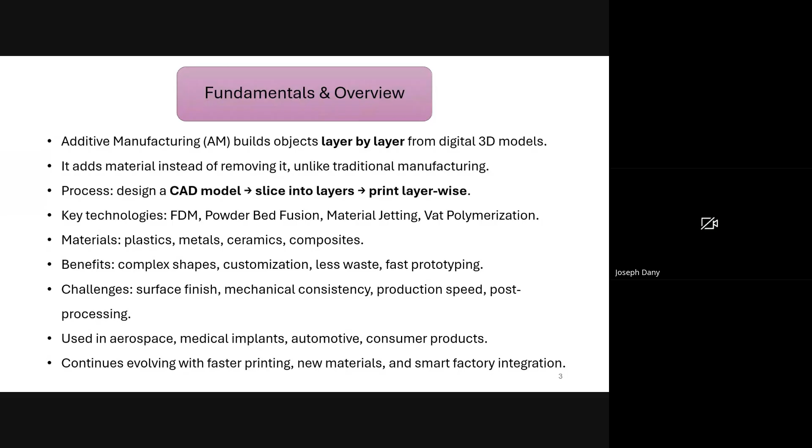AM is expected to evolve with faster machines, multi-material capabilities, integration with smart manufacturing and Industry 4.0, and advances in materials and printing techniques. In summary, additive manufacturing is not just a new way to make things, but a fundamental shift in manufacturing philosophy, moving from subtracting material to adding material, opening new possibilities for product design and manufacturing workflows.

So let's start with the simple question: what are the different additive manufacturing processes? Additive manufacturing is classified into two different categories based upon the route.

The first one is fusion-based additive manufacturing, and the other one is solid-state additive manufacturing. Each of these categories has its own way of building parts, its own advantages, and of course some challenges.

In fusion-based processes, which are probably the more familiar ones, the raw material, usually in the form of metal powders or wires, is completely melted using a high energy source such as laser or electron beam, and then allowed to solidify layer by layer. Processes you might have heard of include powder bed fusion, selective laser melting, electron beam melting, and directed energy deposition. The biggest strength of fusion additive manufacturing is its ability to make very intricate and complex geometries, parts that would be almost impossible to produce using conventional methods.

That's why industries like aerospace and healthcare love fusion-based additive manufacturing. For example, in aerospace, turbine blades with internal cooling channels can be built using powder bed fusion. In healthcare, patient-specific implants such as custom hip replacements are possible. Even high-performance automotive companies like Bugatti have used it to make titanium brake calipers that are both lighter and stronger than conventionally manufactured parts.

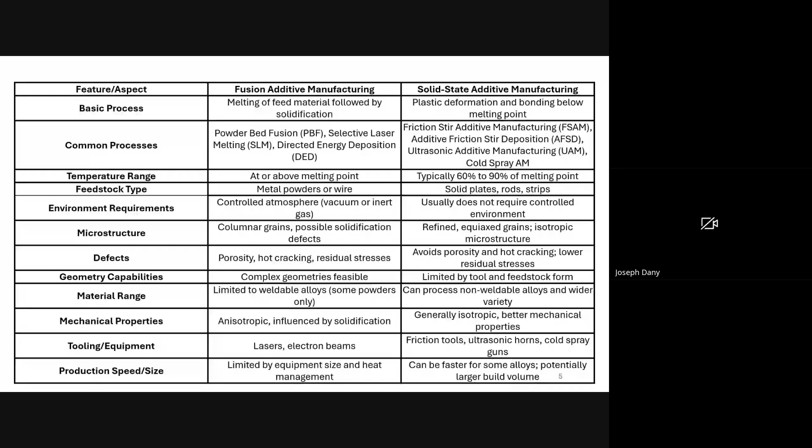Solid-state additive manufacturing is categorized into three different categories: friction welding based, friction deposition based, and friction stir welding based. These are further classified into subcategories: linear friction welding based and rotary friction welding based come under friction welding based additive manufacturing techniques, and friction surfacing and friction deposition come under friction deposition based additive manufacturing.

In friction stir welding based additive manufacturing, there are three different subcategories: friction assisted seam welding, additive friction stir, and friction stir additive manufacturing.

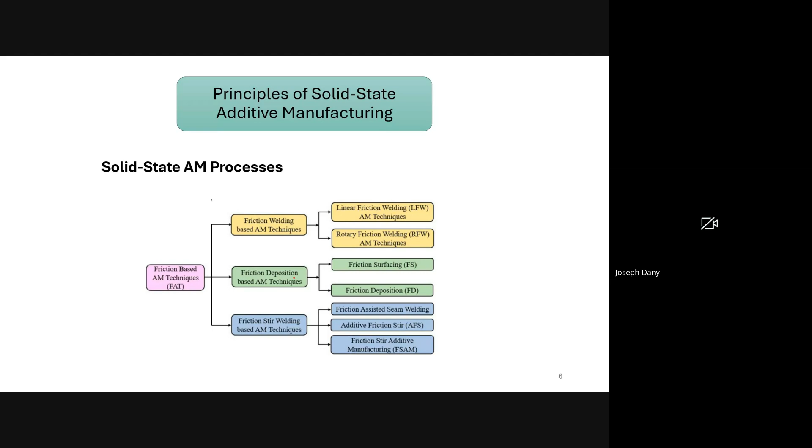First, we will start with linear friction welding additive manufacturing technique. Linear friction welding, often abbreviated as LFW, is a sophisticated solid-state additive joining process that has become particularly vital in industries like aerospace, automotive, and energy due to its ability to produce high-quality, structurally sound welds without melting the base material.

Unlike traditional fusion welding, where the metal melts and solidifies, LFW works by moving one piece in a controlled linear reciprocating motion against a stationary component while applying high axial compressive force. This relative motion generates significant frictional heat at the faying surfaces, the surfaces to be joined, which softens the material at the interface without reaching its melting temperature.

This localized heating allows the material to enter a plasticized state, enabling atomic level bonding and forming a weld with minimal distortion and residual stress. The linear friction welding process can be divided into four distinct phases that ensure strong and defect-free joints.

The first phase is the initial contact and friction stage, where the relative sliding motion causes microasperities, or roughness, on the surface, increasing the real contact area and starting initial heat generation.

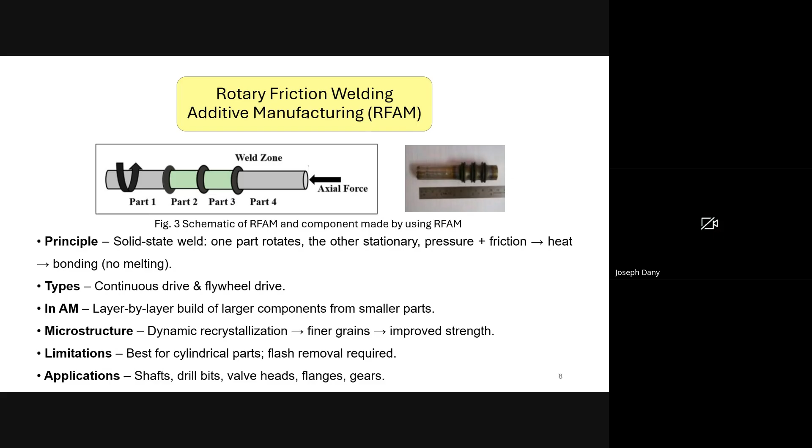When it comes to friction deposition additive manufacturing, it involves using two rods. One is a consumable rotating rod, and another is a stationary substrate rod. Both rods are attached to machine spindles and aligned along the same axis. The consumable rod is rotated and pressed against the stationary rod with a certain axial force.

When these two rods come into contact, friction generates heat at their interface, which softens and plastically deforms the material at the contacting surface. As this process continues, the amount of plastic material increases at the interface. Once the desired thickness of deposited layer is reached, the rods are withdrawn.

Importantly, when the rotating consumable rod is stopped and pulled away, the plastically deformed material remains attached to the stationary substrate. This happens because the torsional shear stress at the interface causes the plasticized material to detach from the rotating rod and stay bonded on the substrate.

For building multiple layers, after depositing a layer, CNC machining is used to flatten and prepare the surface before adding the next layer. This step is necessary to ensure good bonding and surface finish for the subsequent layer.

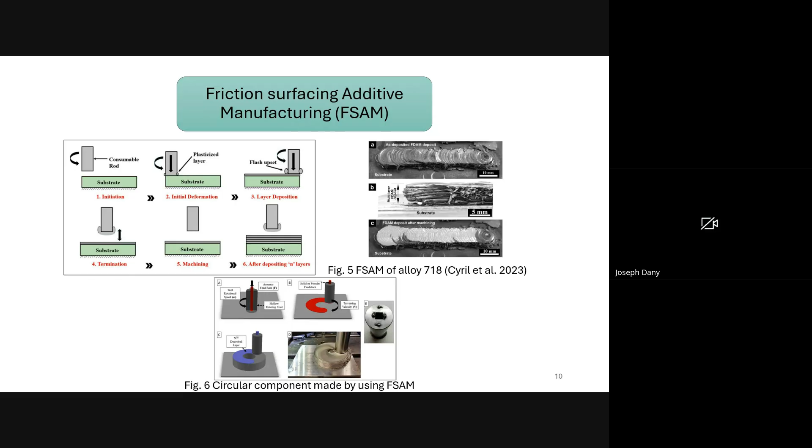Now let me talk about some techniques that are based on the principle of friction stir welding. These include friction assisted seam welding, additive friction stir, and friction stir additive manufacturing. Collectively, we call them friction stir additive manufacturing, or FSAM. In these methods, metals are joined in a solid state, layer by layer, as we have seen in previous additive manufacturing techniques.

Deposition of layers means we can avoid unwanted phase transformation and defects that usually occur in fusion-based processes. The parts produced by friction stir additive manufacturing techniques usually have fine microstructures, as we've seen in friction surfacing additive manufacturing, with grains that are almost equal in length, resulting in fewer defects overall. Essentially, friction stir additive manufacturing combines the strength benefits of friction stir welding with the flexibility of additive manufacturing. This makes it possible to manufacture even complicated shapes in relatively less time. Currently, this technique is mostly used in research for producing simple shapes, but it clearly shows promise as a flexible and hybrid manufacturing technique for the future.

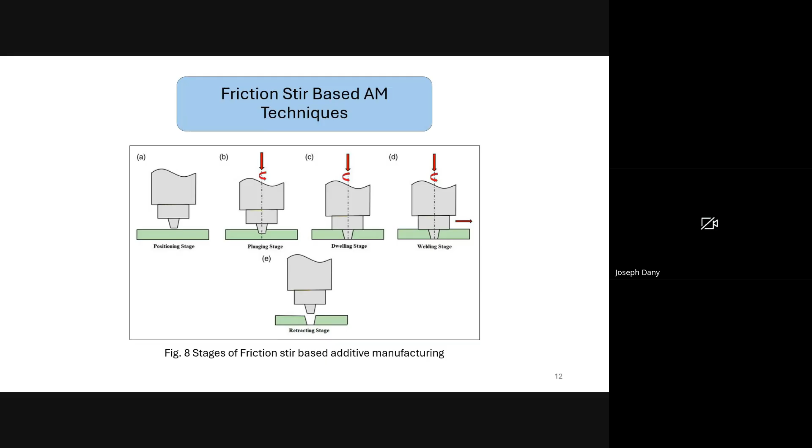Two plates or sheets are placed one over another. Then the pinless rotating tool is pressed down axially onto the top surface of the upper plate. Because of the rubbing action between the tool and the plate surface, frictional heat is generated, which makes the top surface plastically deformed. As the axial force continues, this deformation progresses through the thickness until it reaches the top surface of the bottom plate. The rise in localized temperature here is due to both heat transfer from the tool and the continuous stick-slip action, which enhances plastic deformation.

Now, by repeating this step, similar to the way we do in friction surfacing, we can also perform multi-track seam welding. Coming to additive manufacturing using FASW, here we join multiple layers, either in a single track or multi-track manner. Although studies are limited, this method has been successfully used for materials like aluminum 6061, titanium Ti6Al4V, and stainless steel 304, in both similar and dissimilar combinations, for thicknesses ranging from 0.5 mm to 5 mm.

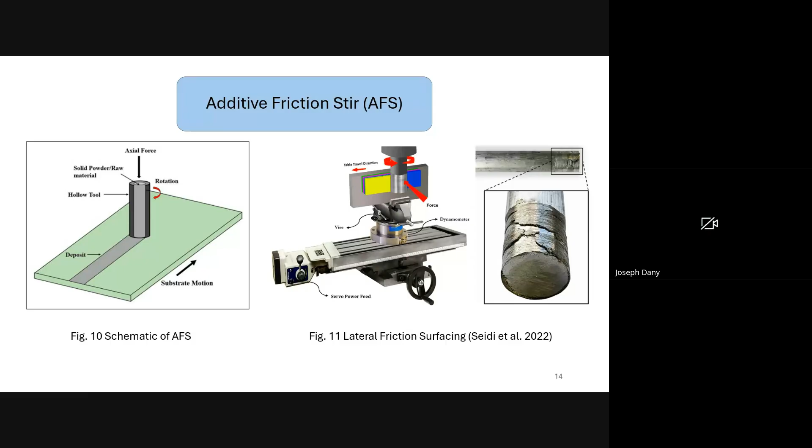The next one is friction stir additive manufacturing. It is a well-known technique in both the welding and additive manufacturing world.

This is a relatively novel technique that combines the principle of additive manufacturing and friction stir welding. The first patent on friction stir additive manufacturing actually came out in 2002.

Later, companies like Boeing explored its feasibility for fabricating aircraft parts. Since then, FSAM has gained a lot of attention in research because it allows us to fabricate materials layer by layer with exceptional structural performance compared to the base materials.

FSAM not only fabricates a component but also gives us the ability to control and modify the microstructure of the part. That means the microstructure can actually be tailored to meet specific customer requirements. As a result, the parts produced by FSAM generally show improved mechanical properties. In fact, even high-strength metallic alloys have been successfully fabricated using this technique.

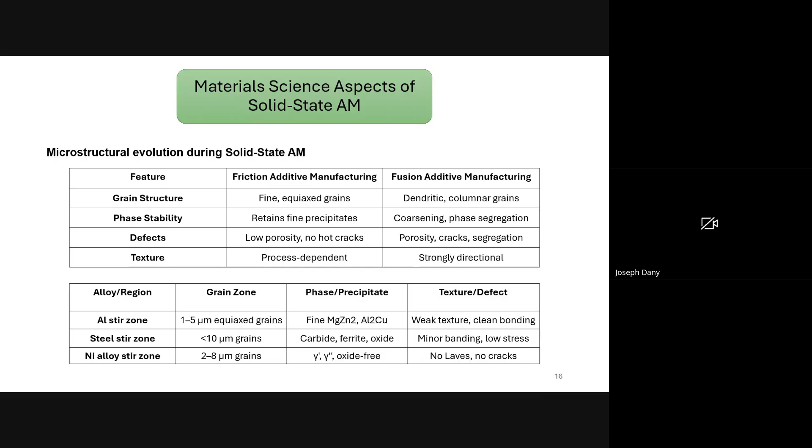Let's break down what happens to the microstructure during friction-based additive manufacturing, like friction stir additive manufacturing. Unlike fusion-based additive manufacturing, where melting and solidification cause a lot of complicated changes, this process works entirely in the solid state. So the metal gets heated by friction, mechanically deformed, and shaped without ever melting.

Just give me a minute.

When we look into the microstructure of fusion-based additive manufacturing, such as laser powder bed fusion or direct energy deposition, it involves layer by layer melting and solidification of metallic powders to build parts. The microstructure evolution is primarily driven by rapid localized melting, followed by very fast solidification rates, often millions of Kelvin per second, and steep thermal gradients. This rapid solidification creates distinct microstructures dramatically different from those in traditional casting and forging.

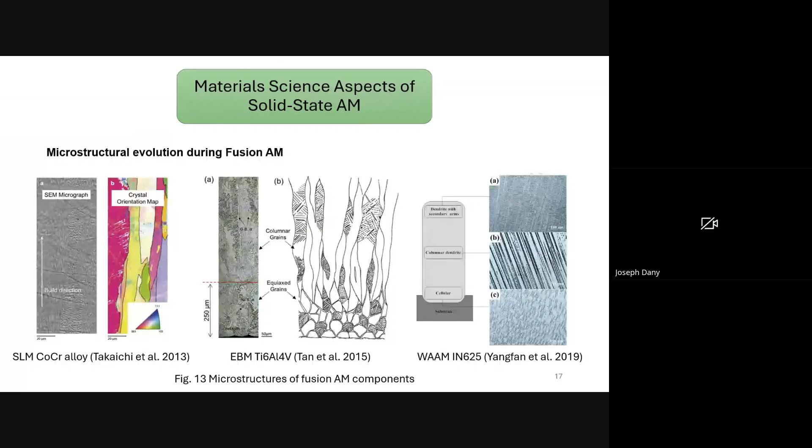Overall, fusion-based additive manufacturing creates complex microstructure shaped by rapid solidification and directional grain growth that impart a unique blend of high-strength, moderate ductility, and anisotropic behavior.

Microstructural evolution in friction-based additive manufacturing is overwhelmingly governed by dynamic recrystallization (DRX), a direct consequence of intense plastic shear and frictional heating imposed by the rotating tool. During friction surfacing, material in the process zone is subjected to very large strain at elevated temperature, well below the melting point.

Those conditions produce very high dislocation density and promote recovery and rearrangement of dislocations into subgrain structure. In high stacking fault energy metals such as aluminum and nickel, this typically proceeds as continuous dynamic recrystallization (CDRX). Subgrains form and gradually rotate and absorb dislocations until low angle grain boundaries convert into high angle grain boundaries, producing new, strain-free equiaxed grains.

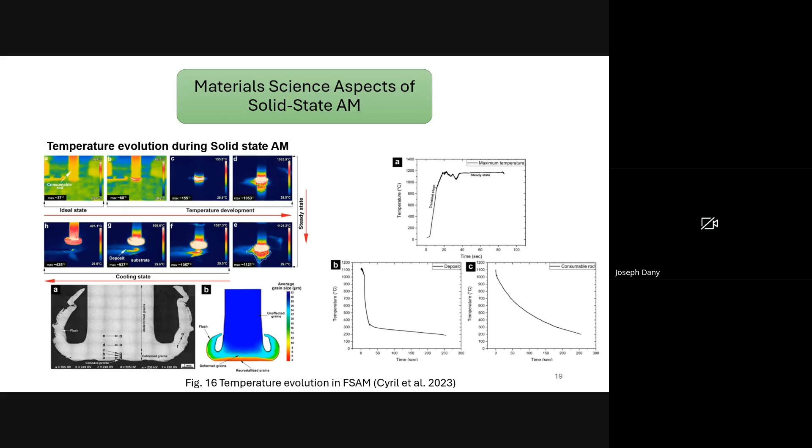Solid-state additive manufacturing generally produces uniform microstructure because the process involves intense plastic deformation and localized heat below the melting temperature, promoting dynamic recrystallization throughout the deposited layer. This mechanism refines grains and achieves metallurgical bonding between layers without the coarse microstructure typical of fusion processes. The consistent localized heat input and deformation cause fine equiaxed grains to form uniformly across the layers, as deformation paths and recrystallization conditions remain similar within each deposition cycle.

However, some cases exhibit microstructural differences between layers, typically in grain size or morphology, due to the complex interplay of heat dissipation, reheating, and thermal gradients during successive layer deposition. The primary reasons are: heat generated at the deposition zone is rapidly transferred to the substrate and previously deposited layer. The underlying layers experience varying degrees of thermal exposure depending on their spatial location relative to the heat source.

So heat flows downward through the cooler substrate material and upward through newly deposited material, leading to different cooling rates and temperature profiles from layer to layer.

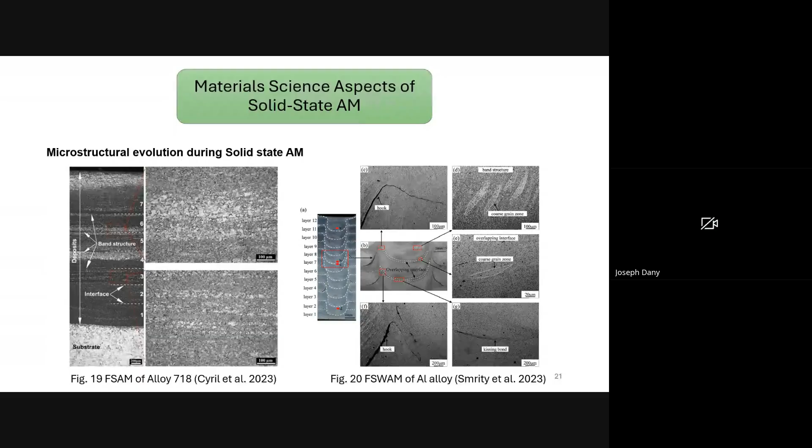In fusion processes, these bands often have a strong influence on the mechanical properties because they are associated with variations in solidification structure, segregation, and residual stresses. However, in solid-state additive manufacturing, the effect of banding on properties is much less pronounced. This is because the overall microstructure is dominated by fine recrystallized grains produced by severe plastic deformation and dynamic recrystallization, which largely govern the mechanical response and tend to homogenize the performance despite the presence of banding structure.

When it comes to defect formation and elimination of defects in solid state additive manufacturing, especially in friction stir welding, friction stir additive manufacturing can broadly be categorized into volumetric defects and surface or joint line defects. Understanding these defects and how they correlate to process parameters allows avoiding them and achieving sound joints.

Volumetric defects include unbonded regions or voids inside the deposited or joined material volume. These voids or unbonded regions degrade mechanical performance and require machining to remove. In solid state additive manufacturing by friction-based methods, improper material flow or insufficient bonding energy causes these defects.

Other defects in FSW-based solid-state additive manufacturing arise mainly due to incorrect parameter settings such as tool rotation speed, welding traverse speed, tool tilt, plunge depth, and force.

There are various surface defects or subsurface defects found in friction-stir additive manufacturing. The first one is surface galling, which is caused by excessive sticking of material to the tool pin, often due to too high weld pitch or excessively hot weld, creating protrusions and lumps on the welded surface.

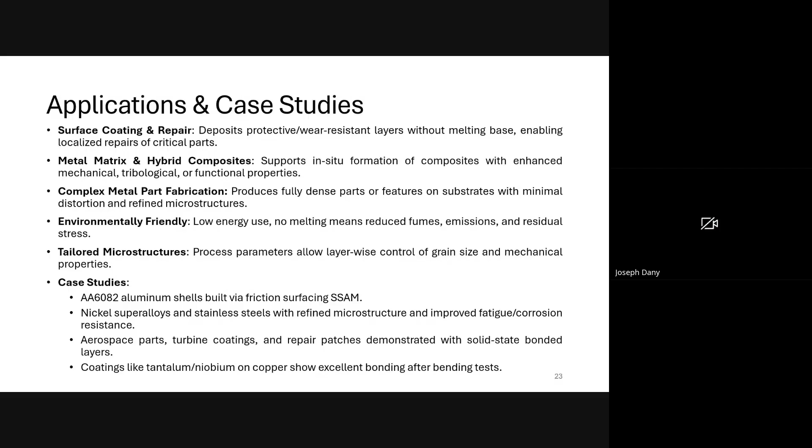These adoption examples demonstrate solid-state additive manufacturing's versatility in joining and repairing, where thermal effects from fusion welding are detrimental. The processes offer superior metallurgical bonding, controlled microstructure, and cost-effective localized repair solutions in critical applications across high-value industries.

I have summarized the challenges and future trends of solid-state additive manufacturing. The first challenge is material limitation: it is primarily effective for ductile materials, with challenges existing for high-strength, brittle, or reactive alloys.

The second is anisotropy in mechanical properties; variations in bonding between layers can cause anisotropy in strength and ductility. Then there's process control complexity: precise control of parameters such as tool speed, force, and feed rate are critical to avoid defects and achieve consistent quality.

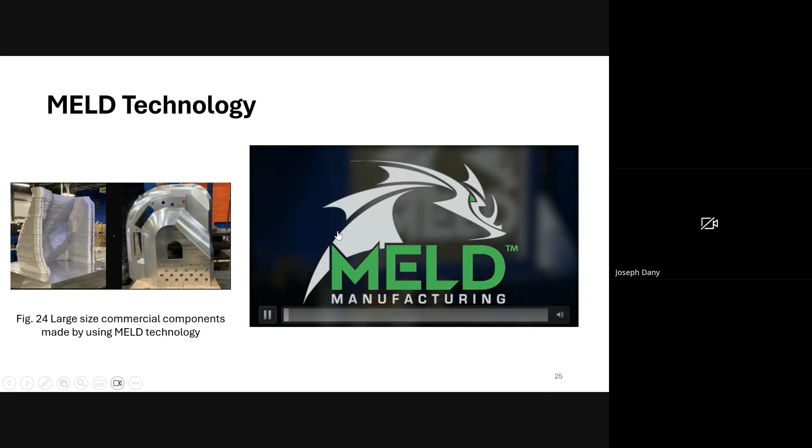Here, if you see, the spindle moves along different directions, which is controlled by computer program, and the consumable material is fed continuously through the spindle.

This seamless operation eliminates the defects during start and stop of the process, and also eliminates the defects produced during layer-to-layer transition during deposition. So we can build a number of layers seamlessly to get large size complex commercial products.

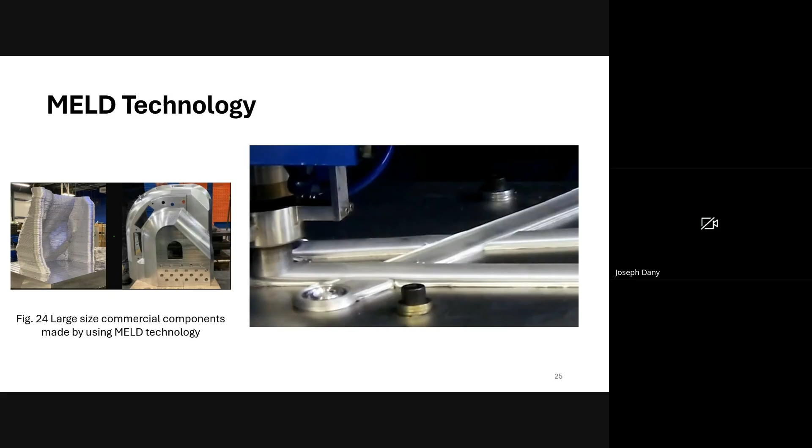I hope this gives you a clear picture of how MELD technology tackles one of the biggest hurdles in solid-state additive manufacturing and opens up exciting new possibilities for metal 3D printing.

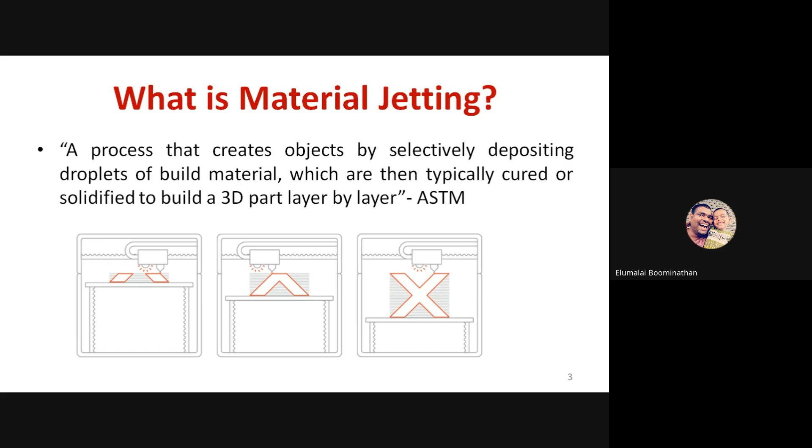Material jetting, as defined by ASTM, is the process of creating objects by selectively depositing tiny droplets of material, which are then solidified layer by layer to build a three-dimensional part. This is very much similar to inkjet printing that we generally use, but except that in material jetting, it is printed in three dimensions, one print over another. In other processes, like SLS and FDM, we use filaments and powders, but in material jetting we use inks, or liquid materials. That is the distinct feature of this process.

Material jetting is widely regarded as a cost-effective and high-throughput technology, especially when precision, surface finish, and multi-material printing are needed. The applications already cover a broad spectrum - microsystems with embedded electronics, optical lenses, functionally graded materials, bio-inspired structures, microfluidic systems - kind of different applications through material jetting.

The material jetting process is very simple. You print through a jet, you cure it, and it generally uses a support structure, then you can remove the support structure and use the product. But there are challenges in material jetting from different perspectives. You have very limited inks, meaning very limited materials that can be printed in material jetting.

There is also something called waveform optimization in droplet formation that we'll discuss later. The interaction between the material jetted from the nozzle and the substrate which is already printed, the curing as post processing, and the multi-material compatibility and characterization of the inks also pose certain challenges for the material jetting process.

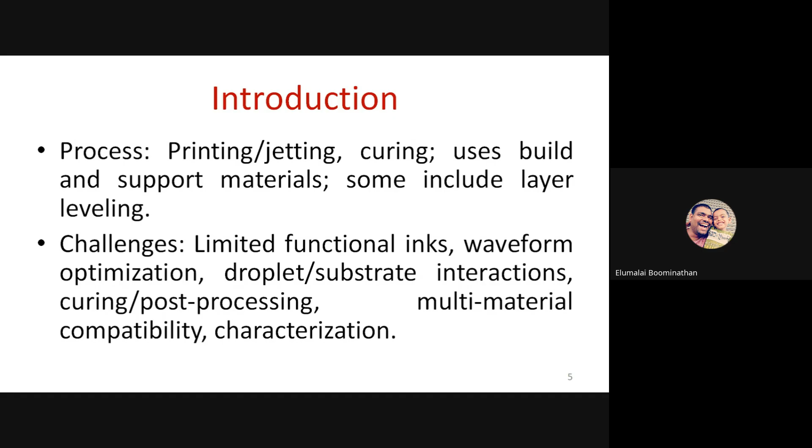There are distinct limitations of the material jetting process. The low mechanical and thermal properties of the material jetted inks lag in performance compared with other additive manufacturing technologies. But there are three or four different categories of the material jetting process that we will discuss one after another.

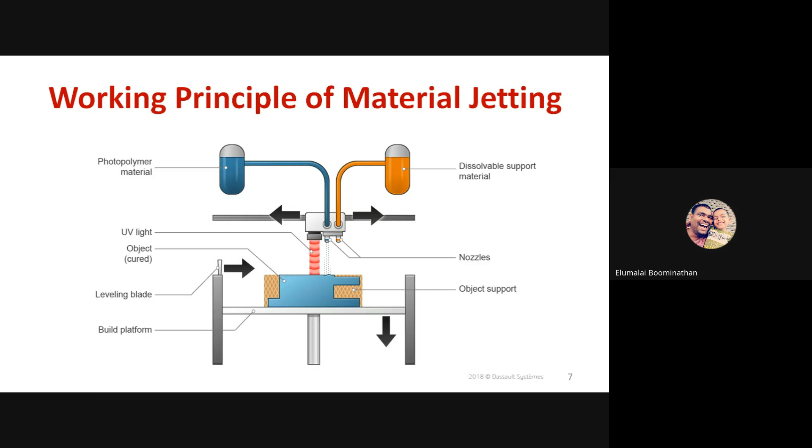So you have multiple nozzles, and some nozzles are used to print the build material, while some nozzles are used to print the support materials.

These are all the major parts of any multi-jet printer. It includes precision printers, a controlled build platform which moves upward or downward based on the layer thickness, a system to control the droplet, and integrated UV curing units.

The advanced multi-jet printers have multiple nozzles to enable different colors or different materials in the same product. For example, you have PolyJet from Stratasys. They can produce multiple materials with excellent resolution. You also have XJet's nanoparticle jetting that allows you to use metals, which we'll discuss.

There are three distinct types of material jetting machines available: PolyJet, multi-jet from 3D Systems, and XJet or nanojet. These three multi-jet printers are commercially available and use three different principles.

The Stratasys PolyJet uses continuous printing, meaning it continuously ejects the ink onto the substrate along with the support. Whereas the multi-jet printing of 3D Systems uses a drop-on-demand system, where the nozzle deposits ink wherever required. Both these systems use UV light for curing, and both can only print polymers.

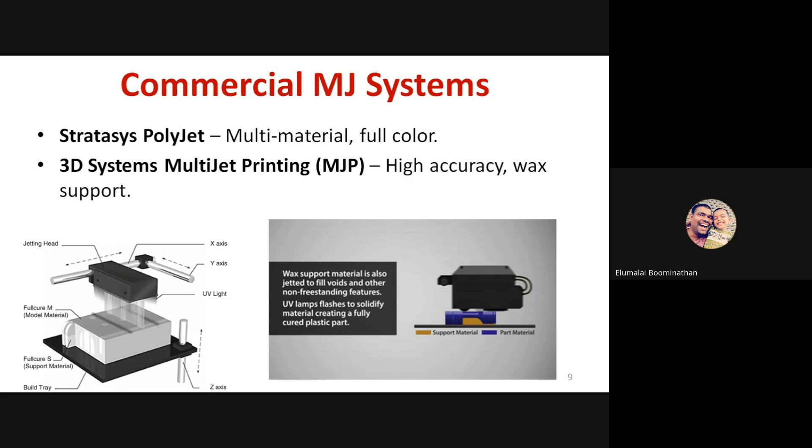We have another multi-jet system from XJet's nanoparticle jetting, in which the ink contains nanoparticles of metals or ceramics, so you can produce a metallic part or ceramic part. Here, instead of UV light for curing, we use a heater, because this ink is very much different from the inks used in PolyJet or multi-jet.

In PolyJet and multi-jet, they use photopolymers as ink. Here, we use nano binders with nanoparticles, and these inks contain nanoparticles of metals and ceramics, whatever you require. After the ink gets printed layer by layer, we have a heating source that will cure the component.

So what I'm trying to say is we have two different kinds of multi-jets. One type uses either continuous ink drops or a drop-on-demand setup, but uses photopolymers as the build material. Whereas nanoparticle jetting uses a different type of ink filled with metallic or ceramic nanoparticles. One type of multi-jet printer uses UV light to cure, while nanoparticle jetting uses a heater to harden the component.

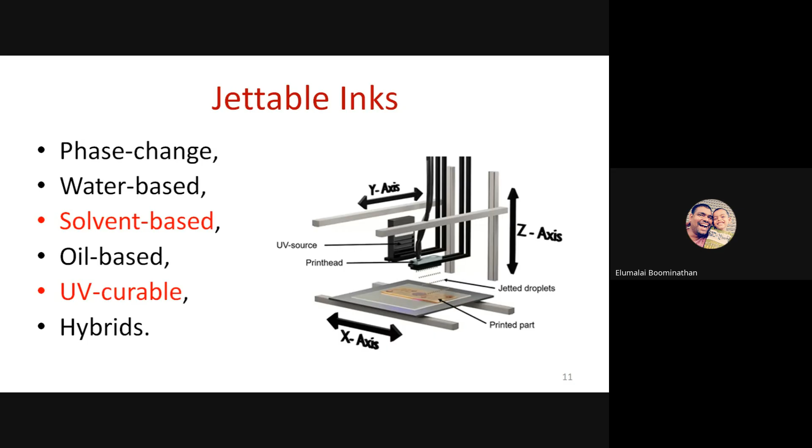The UV curable inks are dominant because they are solvent free and fast curing. They are suitable for 100% solid parts. However, they have certain drawbacks: you have to have a photo initiator inside the monomeric liquid, and the monomers sometimes become toxic. These UV curable liquids are not biocompatible, which limits applications in pharmaceutical or food industries.

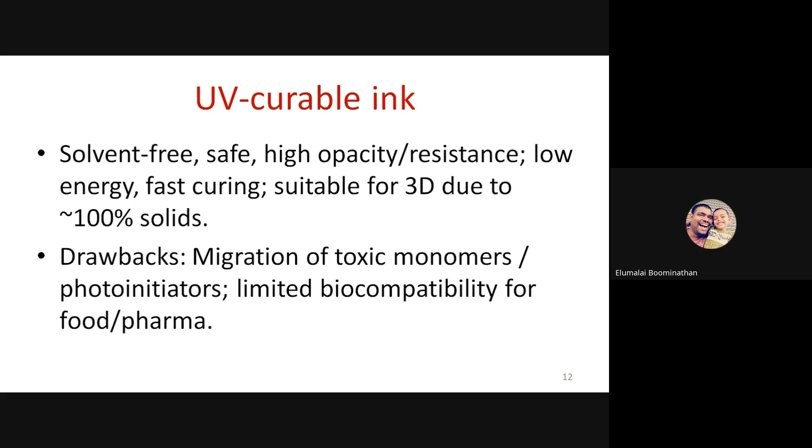Recent research is going on in functional inks. Functional ink means the ink has certain properties, such as being an electromagnetic ink, so you can print an electromagnet.

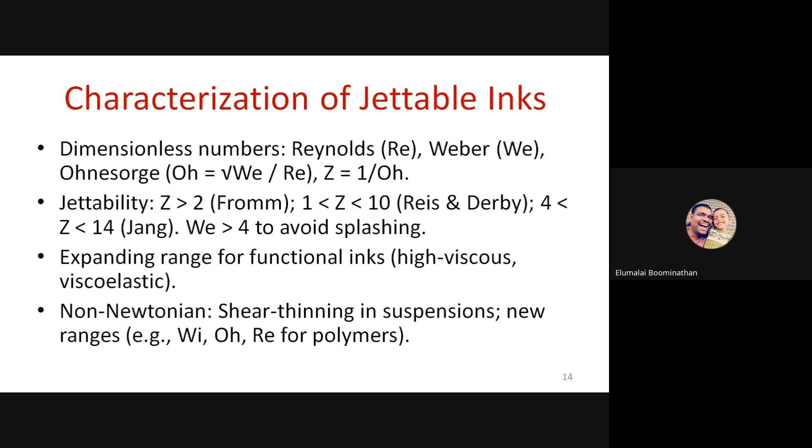So this is the present scenario of the available inks, with the Z value 1 to 10, that is optimum viscosity. In future, research is moving towards high viscous printing, where the printer is capable of printing high viscous non-Newtonian fluids as ink.

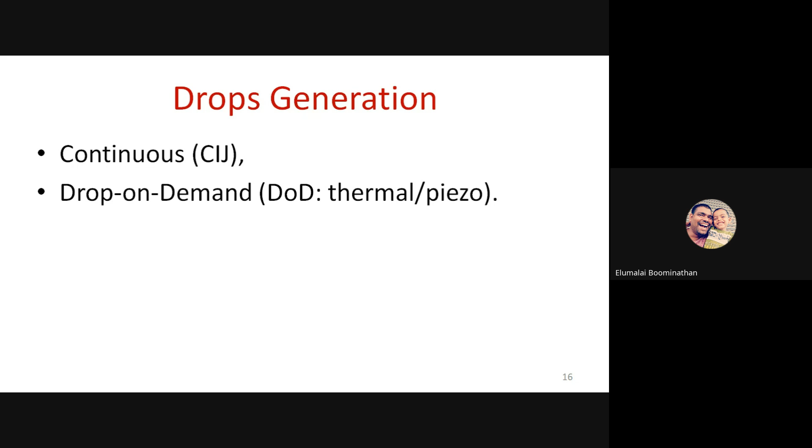In material jet printers, there are two types of ink drop generation generally used. One is a continuous stream of droplets, that is CIJ, continuous inkjet, and another is drop on demand. In drop on demand, droplets are ejected only when needed using thermal or piezoelectric mechanisms.

The droplet catcher is controlled by your STL file toolpath. It catches the droplets wherever that material need not be printed. It allows the droplet to touch the surface wherever it needs to be touched. So here it is continuous inkjet printing: the droplets are forming continuously, but the droplet catcher determines whether to print or not to print.

On the other hand, this continuous method is used in polyjet, and drop on demand is used in multijet. DOD is drop on demand. We have an actuator which receives the pulse train signal. This pulse train signal is determined by your STL file and given to the actuator, determining when to generate a droplet.

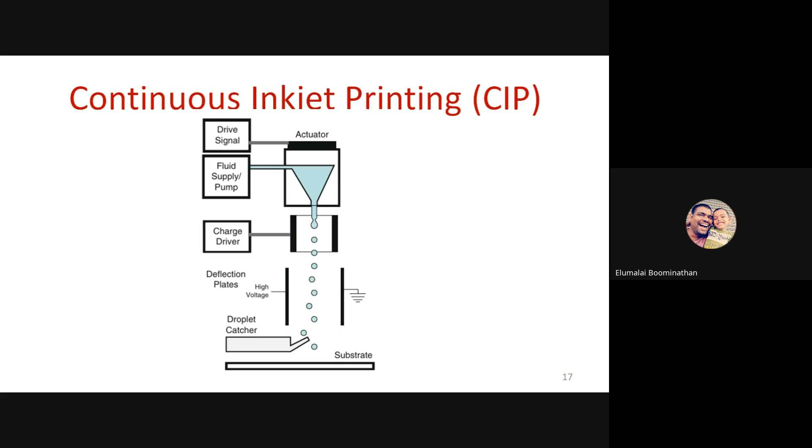I'll repeat: there are two different modes of inkjet printing. One is continuous inkjet printing, where ink is continuously developed. In drop on demand, ink drops are generated whenever required. In continuous inkjet, it is controlled by the droplet catcher, and in drop on demand, it is controlled by the pulse train, which is controlled by your STL file and the toolpath generated by your software.

In drop generation, usually in a DOD type of drop generation, the waveform, that pulse train waveform, is an important parameter which determines droplet size, droplet frequency, and all those things. You have to optimize the droplet frequency so that it doesn't affect the printing process.

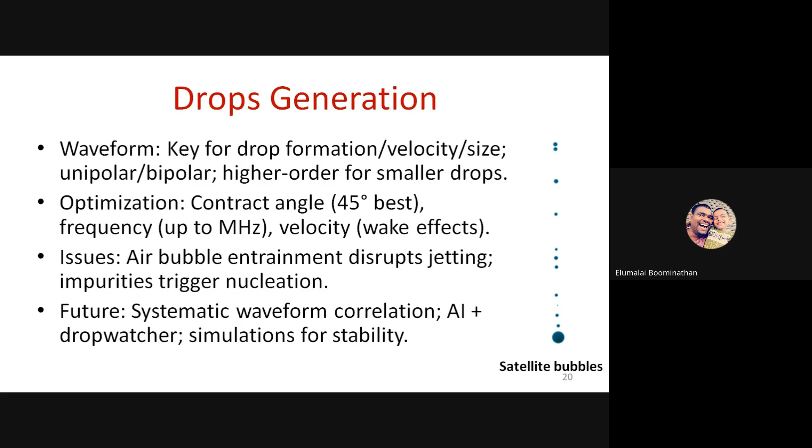There are certain issues in drop generation that need to be optimized or avoided. Air bubble entrainment is usually a major issue in droplet generation, as well as impurities. Sometimes they trigger nucleation, meaning two or more droplets assemble together to form a larger drop.

Another important thing in multi-jet printing is the droplet and substrate interaction. When the droplet hits the substrate, the substrate means the base surface. At the first layer, the substrate will be the build platform; usually glass, PET, or metal build platform will be there. So how the ink drop interacts with the substrate—after the previous printed layer, that previous printed layer will act as the substrate.

So how the ink reacts when it interacts with the substrate has to be optimized. After you generate drops from either continuous drop or drop-on-demand methods, the drop touches the substrate and forms a layer. Then it has to be cured.

We have two different types of curing mechanisms in polymer based material jetting: a free radical reaction and a cationic reaction. These are both photopolymeric reactions. In free radical reaction, the UV photon interacts with the photoinitiator, which ejects a free radical that converts the liquid monomer into a solid polymer.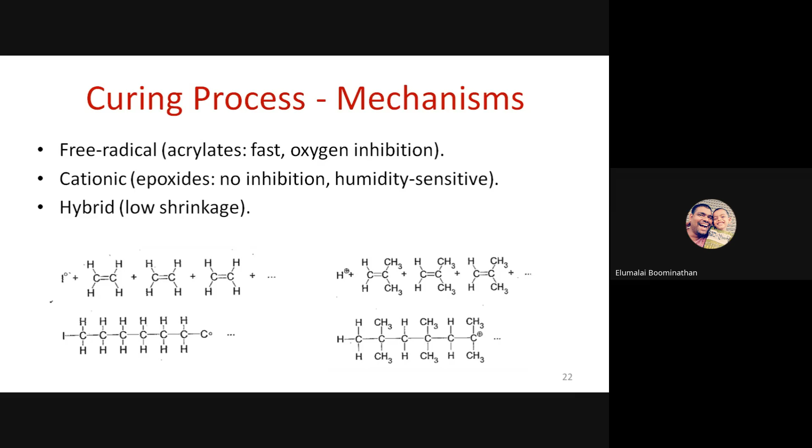But there are hybrid photopolymers available that mix free radical and cationic photopolymers to optimize both the problems of oxygen inhibition and humidity, and slower curing rates. So choosing the right amount of free radical, the right amount of cationic reaction, and the right amount of photoinitiators decides the mechanical stability of your product as well as the surface quality.

For UV curing, two different UV sources are used. One is mercury arc based UV source. Traditional mercury lamps have a broad spectrum of UV wavelengths, but mercury arcs are toxic in nature and highly energy intensive. We also have LED based UVs, which are compact, efficient and safer, but provide only a narrow spectral range of UV, whereas the photopolymer may require a broad spectrum of UV.

So nowadays hybrid systems are used: you have a mercury arc based UV for providing a high amount of UV, as well as an LED based UV system for optimized curing process.

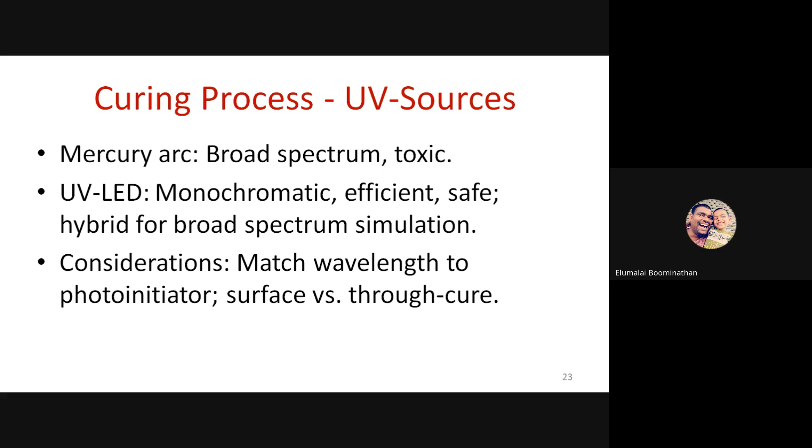We also have different curing strategies. We have cure-after-leveling, that is immediate curing after deposition. The first thing is you deposit one layer, then eject UV rays to cure that particular layer. But the issue is once the layer is cured, the next layer deposited over the cured layer will cause a delamination issue. The interconnection between these two layers may not be as good as solid materials.

So another strategy used is called pinning, where the deposited layer is not cured entirely. It is partially cured with 5 to 10 percent, or 1 to 5 percent, of UV energy to convert the liquid into a gel-like state. This controls the spreading, and the next layer is printed over it and also pinned. Finally, after printing all the layers, they are completely cured using UV rays.

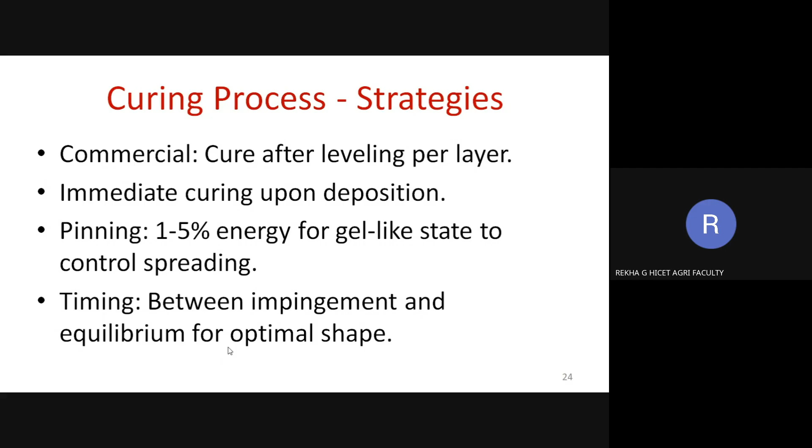Almost all polyjet and multijet UV based material jetting processes require post curing, meaning they have to be cured inside thermal ovens or UV chambers. Sometimes even electron beams are used for post curing. This post curing enhances the cross linking between the polymers and improves mechanical strength. But excessive curing can sometimes cause brittleness, discoloration, or warping.

When you use multi-material builds, if the same product uses multiple materials with different curing requirements, it creates an additional challenge. So the optimum post curing strategy for heterogeneous parts is always a hectic task.

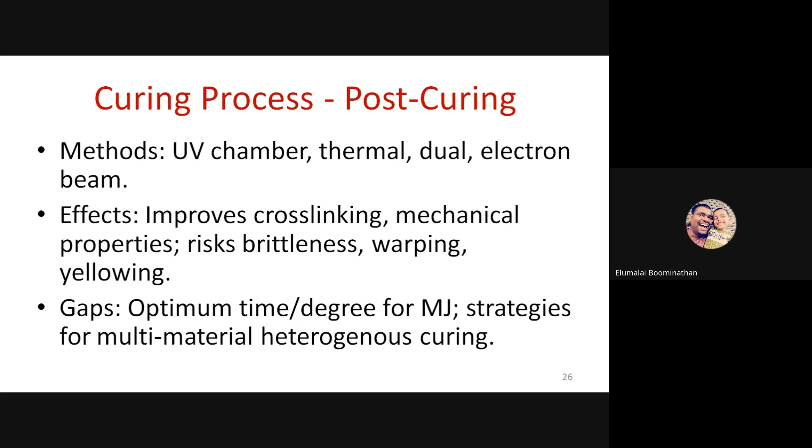So we have to optimize the curing strategy and the ink combination so that shrinkage is minimal. Sometimes in general we have to use support material also, and if the support material and the build material have different shrinkage properties, that will also cause quality issues.

Another important issue is the layer height variation. The consistency in layer height determines the smoothness and accuracy of the final part. The problem arises when there are nozzle inconsistencies - sometimes some nozzles may fail, sometimes some nozzles may eject a larger size droplet, and some droplets will be smaller. So the droplet errors cause uneven layer thickness.

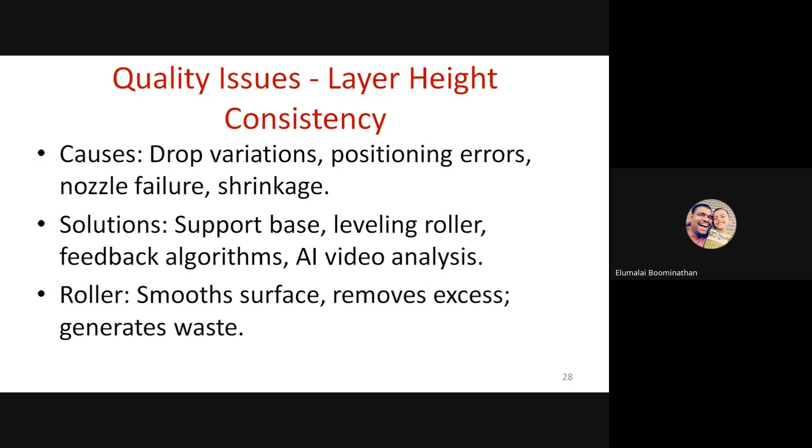And the oxygen inhibition, as we already discussed, is also an issue. When you use UV curable resins, the oxygen in the environment can slow down, sometimes even prevent, the polymerization of the UV curable resin.

Usually the oxygen inhibition issue is a two-edged sword. Sometimes it is positive in the sense that the oxygen inhibition reduces the polymerization process of the layer, so the next layer will have a better bonding. But on the top layer, if you're having oxygen inhibition, the outer surface will be tacky. So you have to optimize the oxygen inhibition.

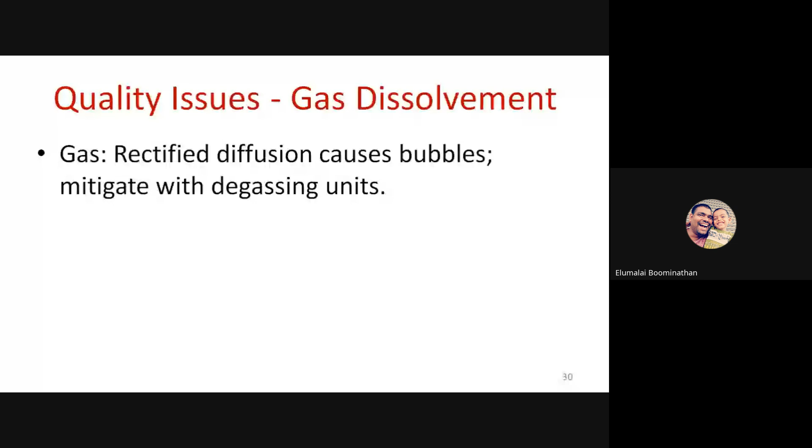That's why we are going for hybrid inks. Beyond shrinkage and oxygen effects, there are issues like gas dissolvement, where bubbles get trapped with gas, leaving pores inside the printed product. Or we have the well-known coffee ring effect, where particles in a single droplet migrate to the droplet edges during the evaporation process, causing uneven deposits.

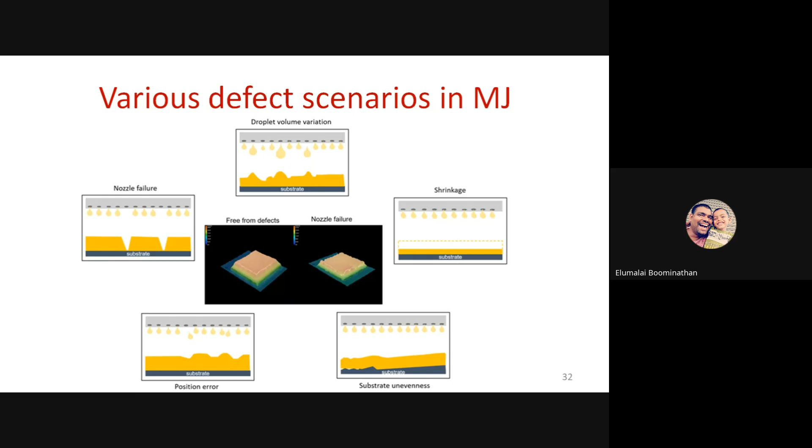These figures summarize some of the issues in the multi-jet material jetting process. If you have a nozzle failure, you have droplet volume variation, you have a position error - meaning droplets deposit in a different position - or droplet shrinkage after solidification. Sometimes the substrate also has an uneven surface. These are all various defect scenarios which cause issues in the final product.

So material jetting applications we'll discuss now. They became very popular in healthcare due to its precision and ability to use biocompatible materials - anatomical models that allow surgeons to plan complex procedures, medical education, dental prosthetics, and orthodontic devices can also be printed with material jetting.

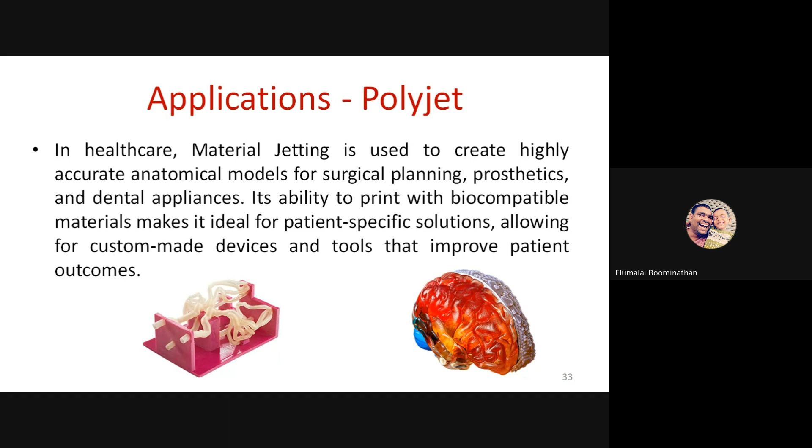In aerospace and automotive sectors, material jetting is primarily used for prototyping and rapid tooling applications. They can rapidly produce full-color, multi-material models to evaluate fit and design before moving to final production. For tooling applications, material jetting provides precise molds and patterns to reduce lead time compared to conventional machining processes.

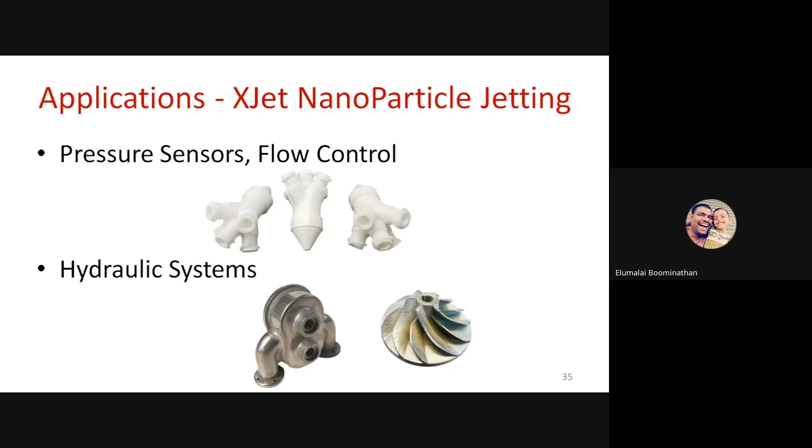Although the structural applications of PolyJet or multijet type material jetting are limited, we have structural applications of XJet nanoparticle jetting. As discussed, there are two variants - one uses photocurable polymer, generally used for multicolor printing, aesthetic applications, or mold making and indirect tooling making. Whereas XJet nanoparticle jetting, a type of material jetting process, can produce ceramic as well as metallic components - for example, hydraulic systems, sensors, high precision surgical tips, and wearable accessories. Those things can be printed using nanojetting by XJet.

Another potential application is in the electronics industry, material jetting with the evolution of functional inks. The functional ink is still in the developmental or research stage. These functional inks in material jetting can effectively print conductive tracks, dielectric layers, or insulating supports on PCBs, various electronic components like RFID antennas, wearable electronics, and microfluidic devices with integrated sensors. These are all possible applications with functional inks.

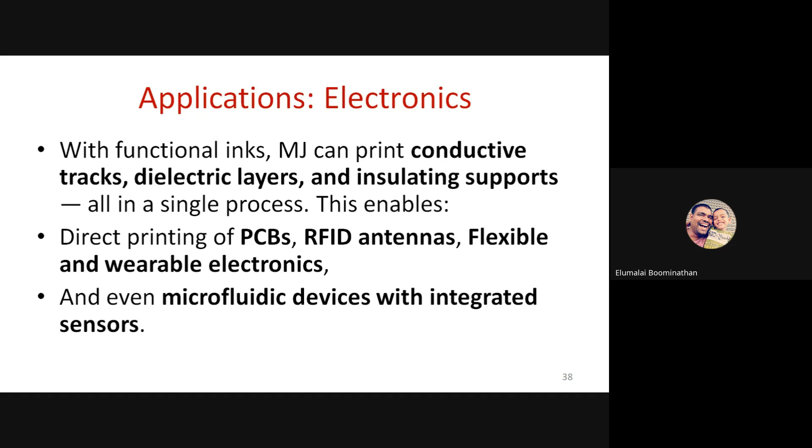From a sustainability perspective, in terms of energy use, material jetting is relatively efficient compared to laser-based processes like powder bed fusion - it mainly consumes less energy for curing. However, the photopolymer resins are difficult to recycle, so these have potential hazardous environmental concerns. Recycling of UV-based photopolymers needs a high amount of research.

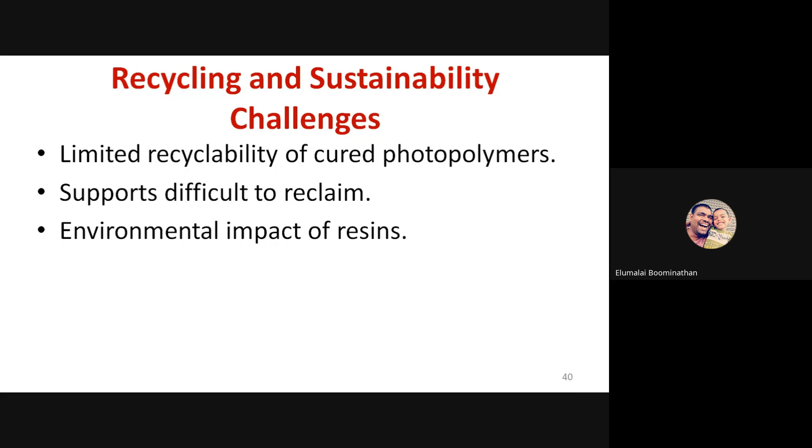There are certain advantages of material jetting, and these advantages are very clear - it offers very smooth surface finish, highest detail and accuracy, and multi-color, multi-material capability in a single product. Post-processing is still required, but it is minimal when compared with other powder-based processes.

Still, the limitations are also very important to understand, so you can improve the process. The multi-jet and polyjet processes use photopolymers, which are expensive and offer very limited mechanical performance. They cannot be used for structural applications, and large printers are sometimes slow. They always require support structures, so you have two types of nozzles: one prints the build material, and one prints the support structure. These are some of the disadvantages of the material jetting process.

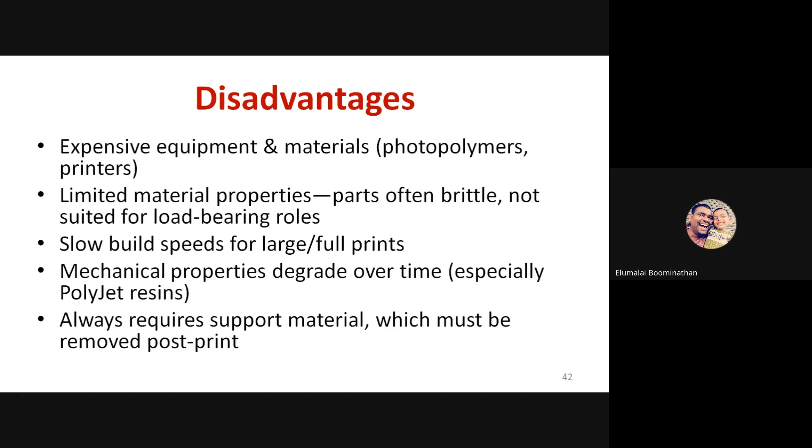The future of material jetting depends on certain parameters and overcoming these material as well as process limitations. You have to develop advanced inks with better mechanical and thermal properties, and develop printers for printing high viscous particle-filled fluids for improved material capabilities. You have to optimize the waveform for stable droplet generation. These are all potential areas for further research and improvement of the material jetting process. You also have to improve the curing methodology and material availability. All those things need to be developed.

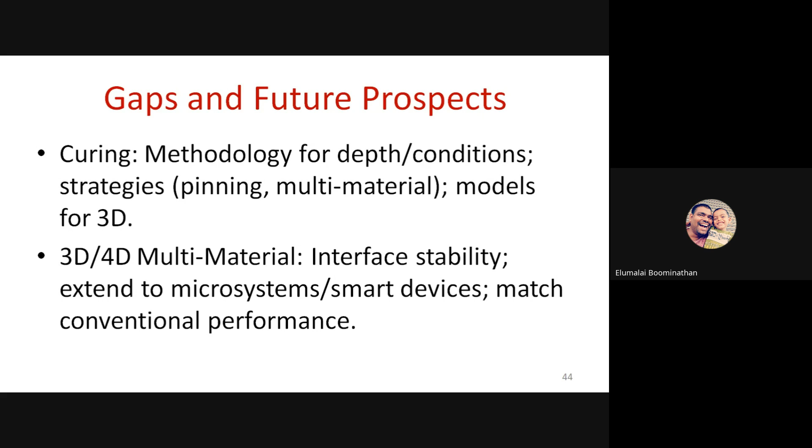In conclusion, material jetting is for high precision, multi-material, challenging products. UV inks are used here, but they have very limited functional applications. In case of nanojet, ceramics as well as metals can be printed. So material jetting has a wide range of applications starting from electronics, bio, pharmaceutical industries, and medical industries.

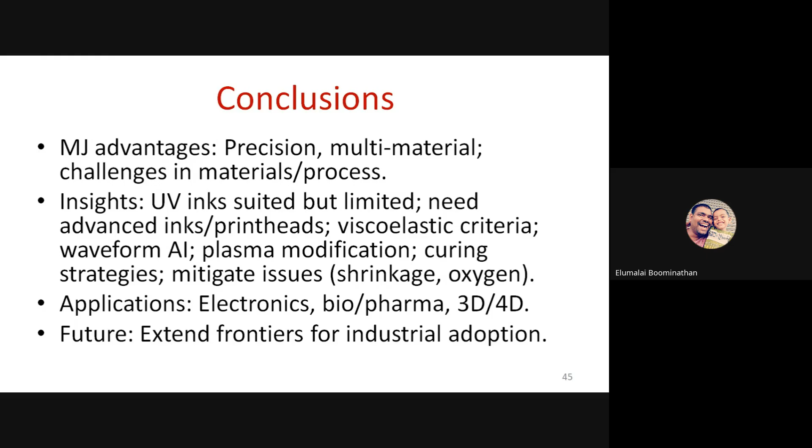Next, we'll move on to the binder jetting process. Yesterday we discussed the powder bed fusion process, right? Binder jetting is very similar to it. In powder bed fusion, you have a powder which is fused together using thermal energy, usually a laser or electron beam. Here in binder jetting, we also have a powder bed. The powder is spread on the bed, and the particles are bound together by a binder. That is the only difference between powder bed fusion and binder jetting.

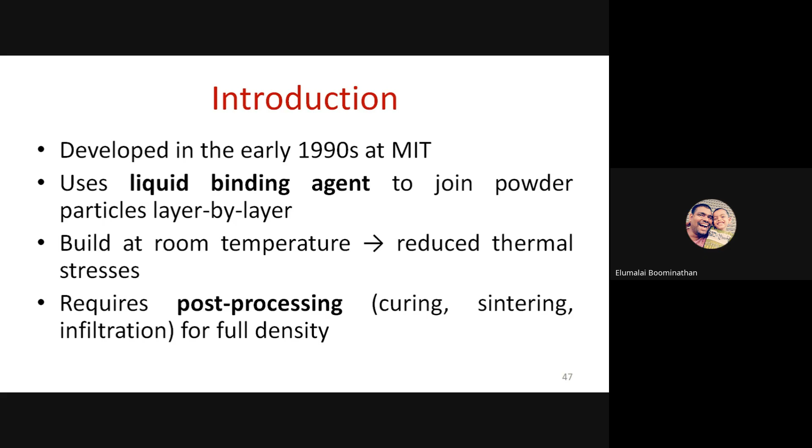Binder jetting is another powder-based additive manufacturing technology. It was developed at MIT in the 90s. It doesn't use any laser, electron beam, or UV light, and usually operates at room temperature. It uses a liquid binder, nothing but a glue, which deposits selectively over the spread powder, creating a green part. The ASTM defines binder jetting as an additive manufacturing process in which a liquid bonding agent is selectively deposited to bond powder materials. In practice, instead of melting or sintering like powder bed fusion, we bind powder granules with liquid adhesive.

Only a fraction of the volume gets deposited with binder. The remaining powder may act as a support structure. So it requires less energy compared to other additive manufacturing processes. But here the catch is that the post-processing steps in binder jetting are very energy intensive, which we'll discuss. This figure depicts the binder jetting process.

Again, the working principle is relatively very simple, and you can compare it with SLS or with material jetting. I'll compare it with SLS. In SLS, we have a powder bed, and we spread the powder to the required layer thickness. On top of it, we have a laser source that selectively sinters the powder, so you get a solid part from the powder. Here, it's the same process: you have a powder bed, you spread the powder to the required thickness, and you have a liquid binder which is jetted similar to material jetting. The inkjet formation and droplet formation mechanisms we discussed in the previous process, material jetting, are also applicable here. We also use either a continuous binder jet or drop-on-demand binder jet. So there are two types of jet generation or drop generation comparable to the material jetting principle.

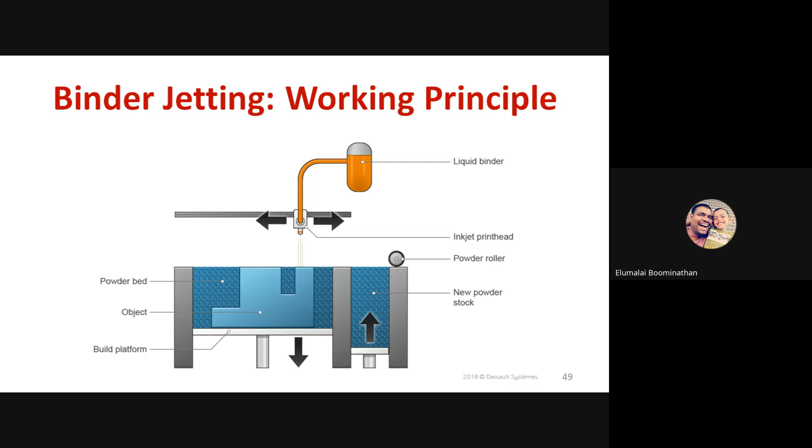It is still in green state, very weak in mechanical structure, very porous. So you have to convert the green part into a structurally rigid part. You have to convert the porous part into a dense part. All those things are done in a post-processing stage.

After cleaning the part, there are two subparts. One is infiltration, usually for densifying the porous product, or otherwise you have to burn out the binder. We use binder to print the product, so you have to remove the glue from the part, then put it into sintering, either infiltration after sintering or burning out binder after sintering.

So you print using powder and binder together, and the material is fed to the build platform either manually or through automated feeding. The printing process is controlled by your CAD profile, and starts with deposition of the binder. Then curing, which is usually an optional step — sometimes there's a UV curing setup with the machine itself, where the binder is partially cured. After that, we have the post-processing we discussed.

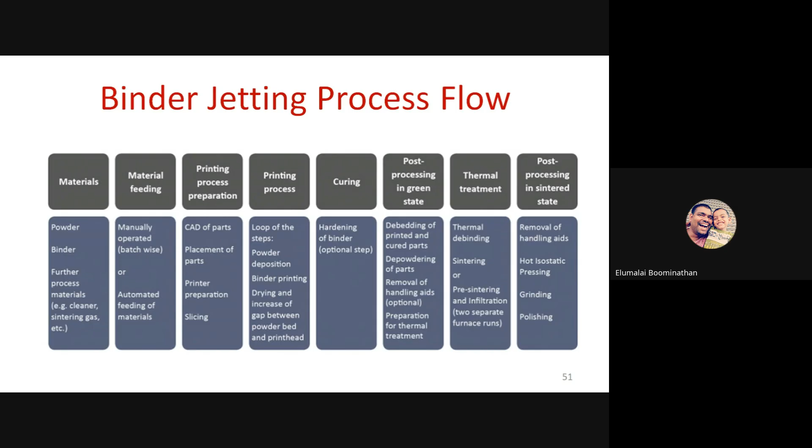Post processing usually involves infiltration, thermal treatment or heat treatment, hot isostatic pressing, as we discussed in SLS, to improve the density, and grinding and polishing to remove the unbound powders on the surfaces.

So a binder jetting machine usually consists of the powder supply and recoating system, where the printhead will be at the top, and we'll have a build platform for the powder deposition, along with a heating system to assist curing of the binder.

As in material jetting, here also we use piezoelectric or thermal inkjet printers at the top to precisely place the binder droplets. The recoating speed, the powder flowability during each layer, and the binder viscosity all impact product quality and reliability. Compared to the powder bed fusion we discussed yesterday, binder jetting is less complex, but precise synchronization between powder spreading, binder deposition, and the leveling platform is crucial for accurate part printing.

In binder jetting, we use all the engineering materials like polymers, ceramics, metals, and composites. For metals, we can go with stainless steel, Inconel, titanium alloys, and various other metal powders — all can be used in binder jetting.

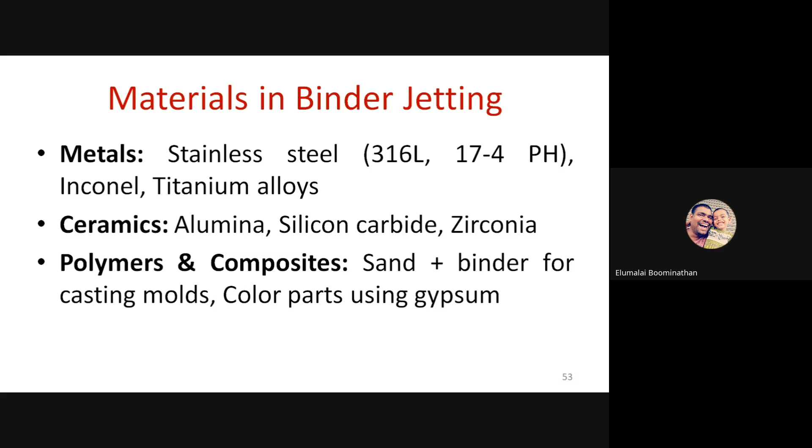Whatever ceramics, polymers, or composites, all are possible in binder jetting because it is determined by the binder, and the final product needs to go through a huge amount of post-processing steps.

Binders are generally produced based on the powders used. We have organic binders such as polymers and waxes, and we also have inorganic binders like silicates. They're usually suited for ceramics, and specialty binders are being developed for reactive materials and other special purpose applications.

The interaction between the binder and the powder is very essential for the strength, porosity, and defect formation in the product. So the control of the binder and powder interaction needs to be studied and optimized.

Now, when the binder droplet touches the powder bed, they interact in very complex ways. We can see whether the binder on a powder bed penetrates more or spreads more, and this depends upon the nature of the binder and the powder.

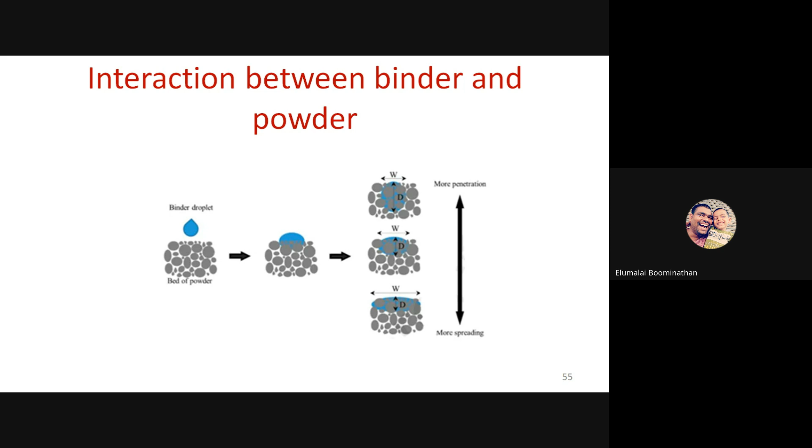Powder nature, meaning powder size, powder type, whether it's metallic, ceramic, or polymer, and what kind of binder we are using, what its viscosity is — all these determine how much it penetrates and how much it spreads. So penetration and spreading have to be studied well so that the required amount of binder is deposited through the nozzle.

These are the possible three mechanisms when the binder interacts with the powder. One is tunneling, where the binder rolls over the surface and forms a bigger chunk of powder balls. In spreading, the powder is not usually disturbed — the binder gets attached to the surface and spreads to the required area. Sometimes crater formation also takes place when the binder hits the powder surface and creates a crater. Crater formation and tunneling need to be avoided.

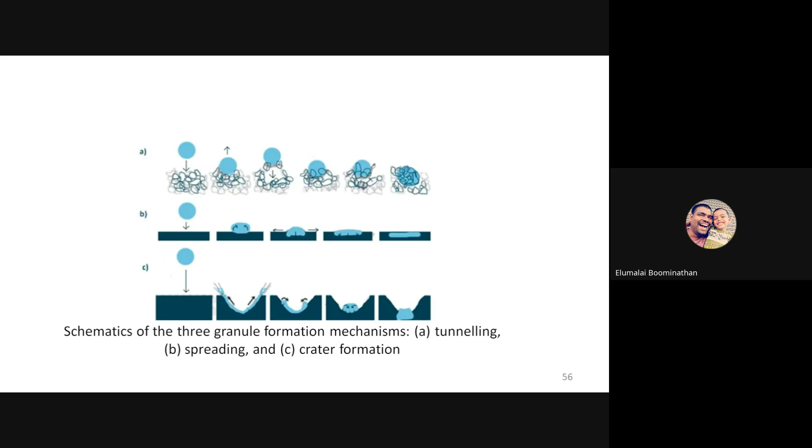So we need to have a proper spreading of the binder over the surface. The proper spreading and penetration is also determined by the thickness of the powder you spread. The powder layer determines how deep the binder is spread. So you need an optimum thickness. If the thickness is very small, excessive spreading will take place. If the thickness is very high, the binder won't penetrate to the required depth. So you have to play between the layer thickness and the binder quantity to get the required amount of penetration and spreading.

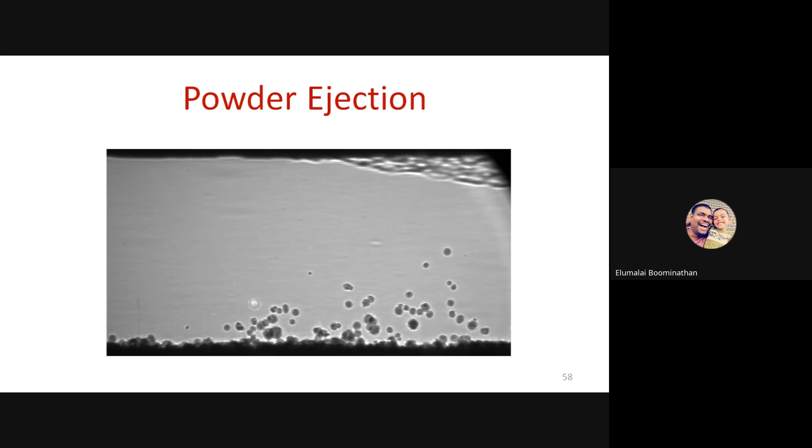Also, powder ejection is one of the major issues in binder jetting printers. As you can see in the video, when the binder hits the surface, powder particles get ejected from the surface. Though they are very small in quantity, they affect the property of the product. So you have to study all these effects - tunneling, powder ejection, crater formation - so that we reduce defects in the final product.

So binder jetting performance usually depends upon process parameters like binder saturation - how much binder you're going to use - and the layer thickness you're going to use, which generally ranges from 50 to 200 micrometers. What is the droplet size you're going to use? The droplet size also matters. If the droplet is very minimal, very small in size, it won't penetrate enough, it won't spread enough. If it's a very large chunk of droplet, it may create a crater.

It may eject the powder from the build platform. We also have print resolution, recoating speed - all these parameters are also very vital to ensure the quality and mechanical property of the built product.

As we discussed earlier, binder jetting products need a very high amount of post processing. The post processing starts with depowdering, where the unbound powder is removed from the green part, and then it's put inside the oven for removing the solvents in the binder. Then sintering takes place, usually for densifying metal as well as ceramic parts.

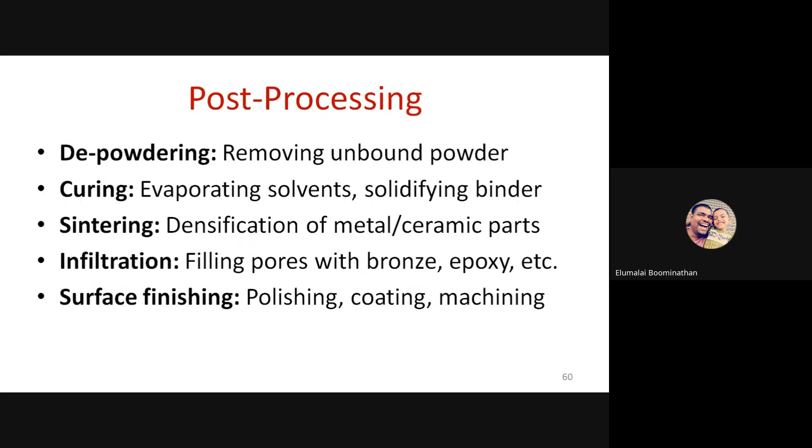Now we will discuss the advantages and various applications of binder jetting. This binder jetting process has different advantages. It eliminates thermal stress in the printing process. In a powder-based process like SLS or SLM, there are huge amounts of thermal stresses on the built product. But here, again we use powder, we can build ceramic or metallic parts, but with less thermal stress.

And you can have large build volumes in binder jetting, so you can have large scale production, and its productivity is very high. You can have different types of materials, meaning it has very high material versatility. Additionally, binder jetting can print full color - the binder ink can be of different colors, so you can have multicolor products.

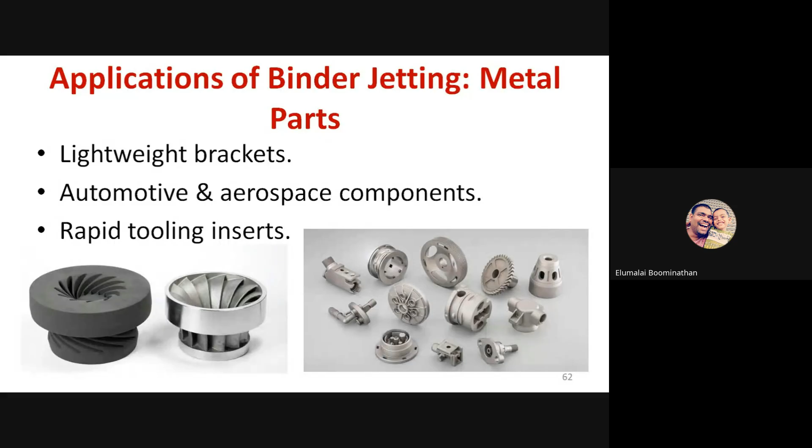Now we'll discuss various applications of binder jetting. We have different metallic binder jetting applications like lightweight brackets for aerospace, automotive components, rapid tooling inserts - all those metallic components. In the figure at the left side, you can see two blades: one is the green component, the right side one is the final product. That black colored one is directly from the printer. After post processing, curing, and infiltration, we get the metal part out for your application.

In sand mold, binder jetting is a very standout application in molding. In binder jetting, you can print metal, you can print ceramics, you can print polymers. You can also print green sand, which is usually used in molding casting applications.

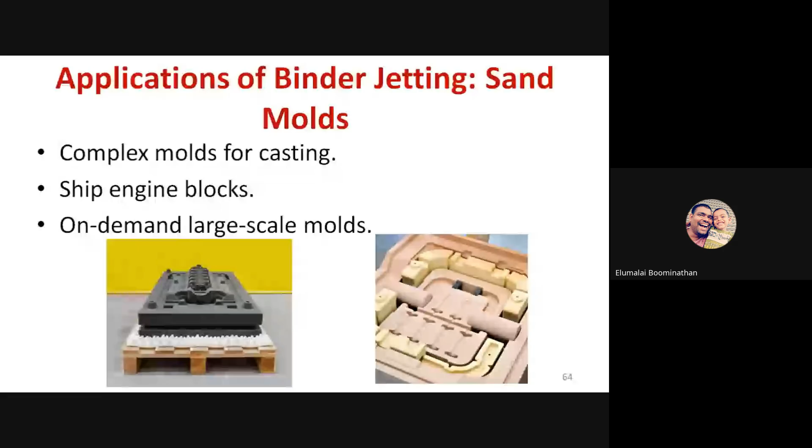In foundries, binder jetting is used to fabricate large scale components, large scale molds for casting, large scale cores for casting, and very complex core structures and patterns, all printed using sand as the build material. This reduces lead time in foundries when you need to produce very complex products in casting.

In ceramics, we have a different kind of applications. You can print zirconia, you can print SiC, you can print various types of ceramics. These zirconium oxide ceramics are used in biomedical scaffolds with porous structure.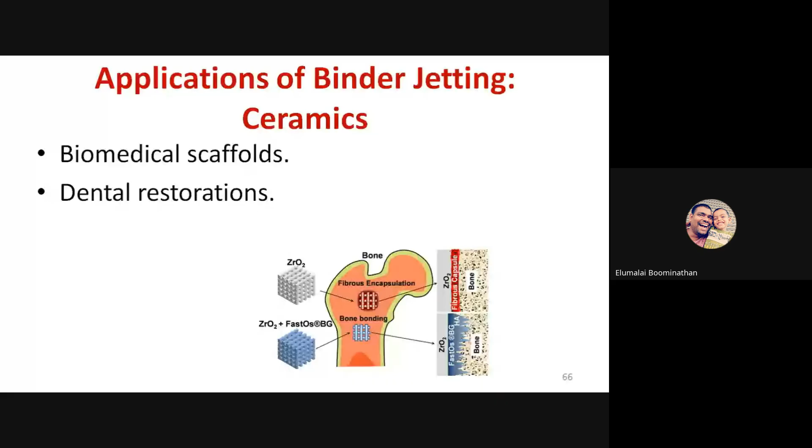There are certain very distinct advantages of the binder jetting process over other additive manufacturing technologies. It generally requires no support structure, as the unbound surrounding powder provides a natural support, and it is compatible with a wide range of materials. It can print metal, ceramics, sand, polymers - you name it, it can print it. The only thing is it needs to be in powder form. You can print at very large scale with less energy consumption during printing, and multi-material and full color printers are possible from binder jetting.

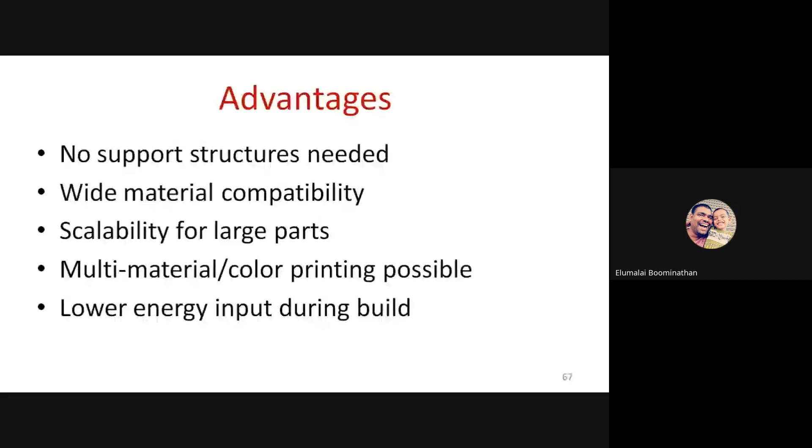But the limitations are also equally significant. The parts from the binder jet machine are very weak in nature, very porous in state, and they require very extensive post processing. Porosity control is a major issue in binder jetting. Infiltration is possible, but you have to use liquid metals, sometimes bronze, that cannot be compatible with the required metal. So infiltration also can be done. HIP, that is hot isostatic pressing, as we discussed, can also be used to increase density. Still, porosity is a major issue in the binder jetting process.

As we discussed in material jetting, in binder jetting also there are very unique quality issues. One of the major issues in binder jetting is feeding of the powder on the build platform. Either you can underfeed or overfeed, and that is going to be an issue. Binder migration and binder bleeding is also going to be an issue.

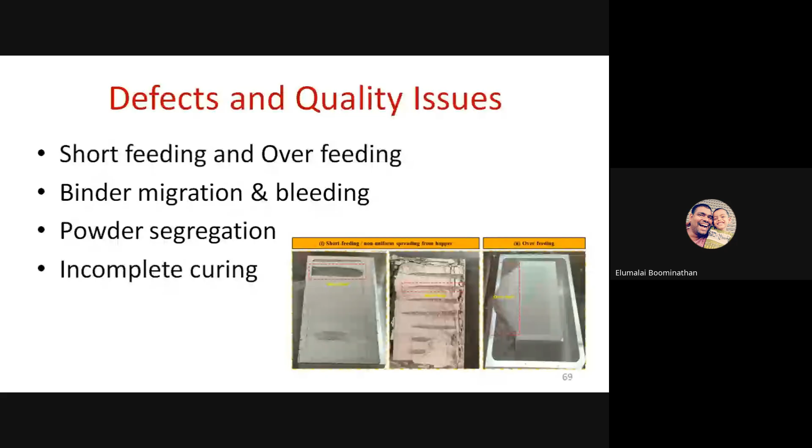The binder is deposited in a particular place. When the binder can migrate inside the layer, it can bleed outside the product also - that is one issue. Powder segregation means the funneling effect will cause the powder to segregate in certain places. Incomplete curing - the binder may not cure in all places in a uniform manner - is also an issue. You can have a smearing effect, smearing and cracking, and delamination between the interlayers because of issues with the binders, where the different layers won't stick together. These are some of the potential issues in binder jetting.

Now, the recent trends are towards improving the mechanical properties and reliability of binder jetting products. Nano binders, nano additives in the binders may increase the green part strength in future. There are hybrid approaches combining binder jetting with hot isostatic pressing, where binder jetting is followed by a HIP process that yields dense metal parts. Functional binders are also being researched for applications like self-healing or conductive components. As in any field, AI-driven parameter optimization and machine learning-based control is also a research trend.

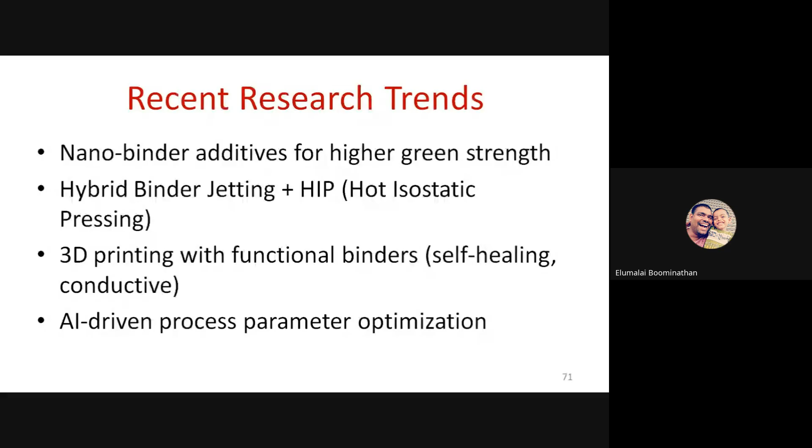As we've discussed, the sustainability aspect of binder jetting also needs to be studied. Binder jetting has very high powder reuse because the binder is spread in a limited, required area, so the remaining unbound powder can be reused multiple times. This reduces waste, and energy consumption is very low because you build at room temperature and just use a binder. But there are issues - binder toxicity and emissions from the binding process and from the further curing process. All those things need to be studied from an environmental perspective.

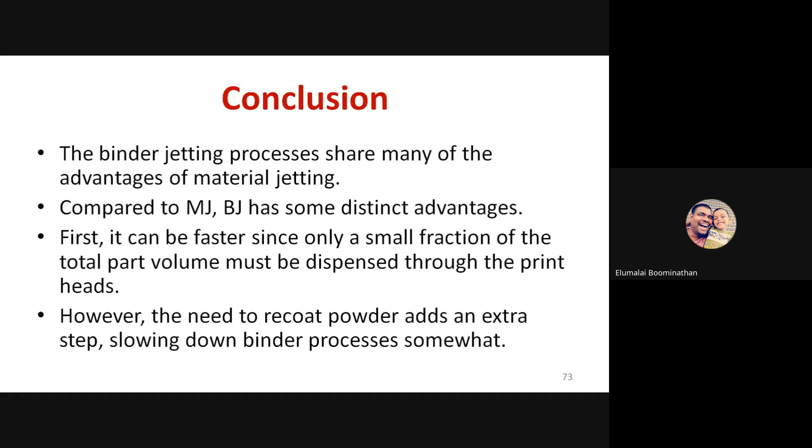So in conclusion, binder jetting has various advantages of material jetting, the first process we studied. Compared to material jetting, binder jet has some additional advantages. It is faster than material jetting. Second, the combination of powders available for binder jetting is high compared to material jetting - in material jetting the material is very limited, whereas in binder jetting you can have different types of material. Thirdly, high range - you can build very large parts, ceramic or metal parts can be produced. Binder jetting also has the same advantages as material jetting.

You can print multiple colors, multiple functional parts. In comparison with material jetting and binder jetting, they may look similar, but there is a slight difference in the mechanism of the process.

In material jetting, it is droplet deposition followed by curing, either UV curing or heat-based hardening. In binder jetting, we use binder or glue, then followed by rigorous post processing.

In material jetting, we can use photopolymers and nanoparticle inks for metal and ceramics, whereas in binder jetting, we directly use metal powder, ceramic powder, or sand as the product. The resolution is very high in material jetting, whereas in binder jetting, comparatively it's a moderate resolution.

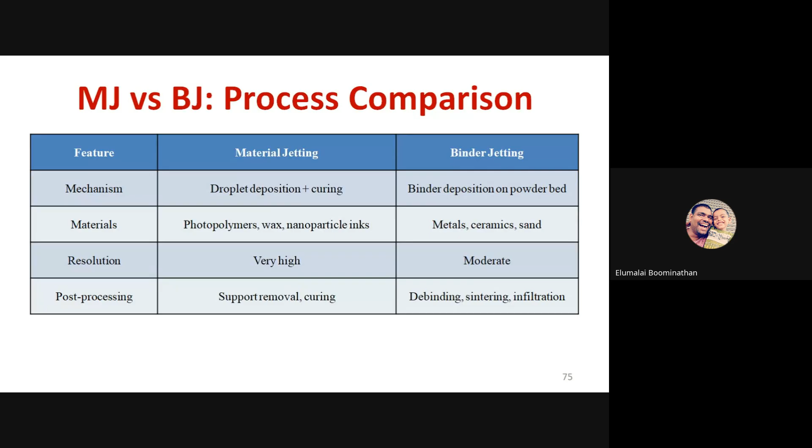Post processing in material jetting is simple support removal. Usually soluble supports are used, either water soluble or alcohol soluble, so it's easy for support removal. So very limited post processing is required in material jetting, whereas in binder jetting you have to debind the unbound powder, sinter, infiltrate, and heat treat. All this post processing is very rigorous in binder jetting.

From a sustainability perspective, material jetting has limited recyclability, meaning we cannot recycle the photopolymers, whereas in binder jetting we can reuse the powder with less energy consumption. So compared to material jetting, binder jetting is highly sustainable from an environmental perspective.

But both material jetting and binder jetting use costly materials and costly machines. Both lack standards and have scalability issues; you cannot mass produce using either machine. They have specific advantages and can be adapted for particular applications, but they have issues with their mechanical strength.

They also have aging related issues. For example, in material jetting, the photopolymers cannot be used in a humid environment or high temperature environment. They can lose their mechanical property as soon as they hit a particular threshold.

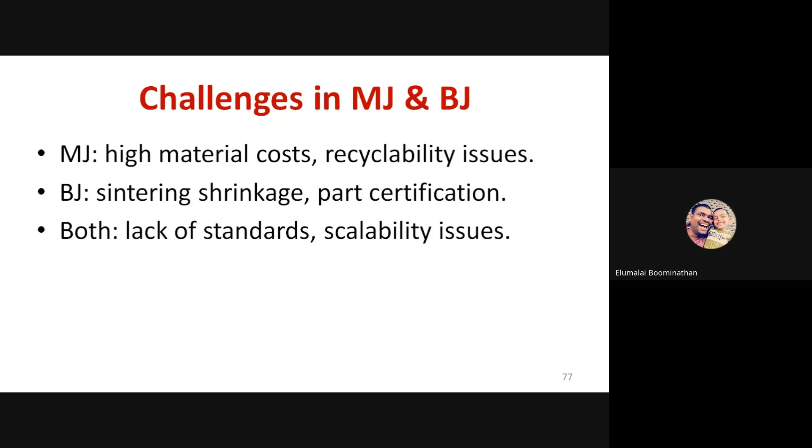With this, I'll end my presentation. If there are any queries, feel free to ask.